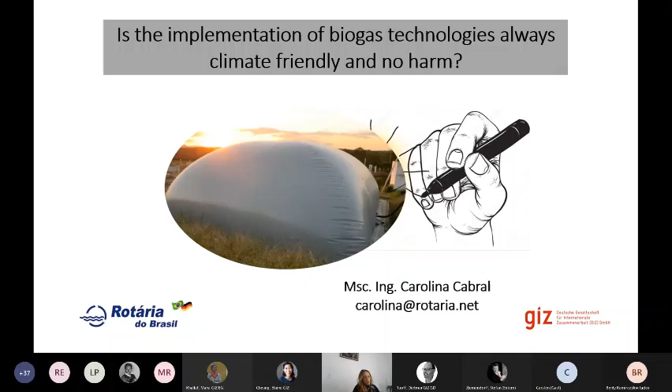So in theory, the anaerobic treatment is less energy intensive. You have biogas production that you can use for energy recovery, and it consumes less energy from the traditional sources. If you have energy recovery, then you consume even less energy from traditional sources, and then you have emissions reduction, mitigation. So in climate-friendly projects, the common thought is that anaerobic treatment with biogas recovery is always better for the environment than aerobic treatment.

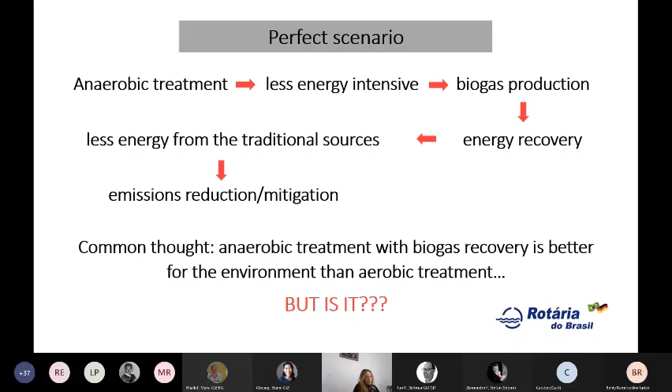When you talk about wastewater treatment, you need to consider if the project is going to be fully implemented and well operated. But yes, of course, for wastewater treatment, anaerobic treatment systems have large applicability. They have several favorable characteristics like low cost, low solids production, and operational simplicity. Also the environmental conditions in Latin America and other warm climate countries are favorable to anaerobic digestion. So this is an option we should consider, especially in these countries, to apply this kind of technology.

But if you think about biogas projects, or anaerobic treatment systems that use the biogas being produced, then this step, the operational simplicity, is not that simple anymore. So this is something we need to consider.

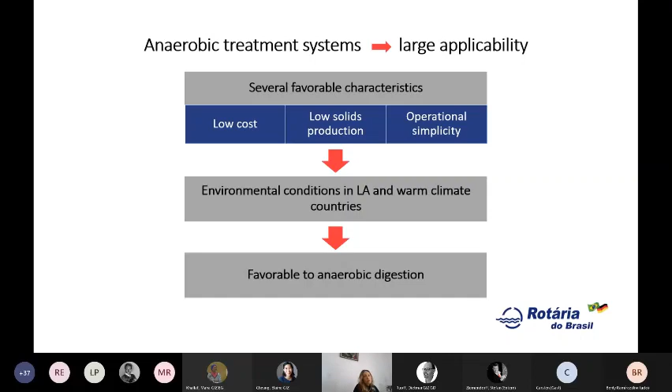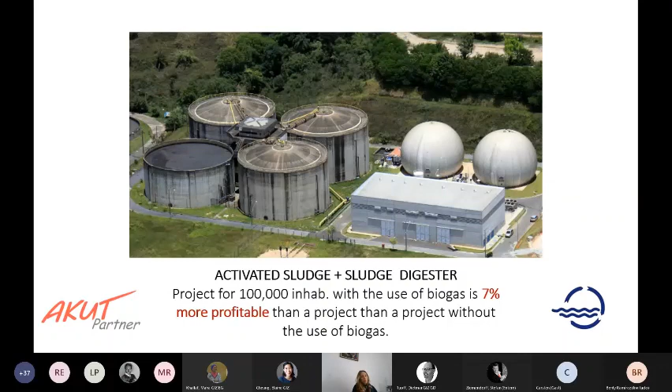But in projects well operated, we calculated some scenarios, and yes, usually the projects with biogas recovery, with energy recovery, are more climate friendly and also more profitable than a project that doesn't use the biogas. So we did scenarios with different treatment technologies. For example, activated sludge plus sludge digester: a project with 100,000 inhabitants using biogas is circa 7% more profitable than a project that didn't use the biogas. This considers all investment and operational costs for the biogas treatment implementation, the CHP implementation, and all the energy recovery parts. So it's even more climate friendly, and also 7% more profitable because of the energy being produced.

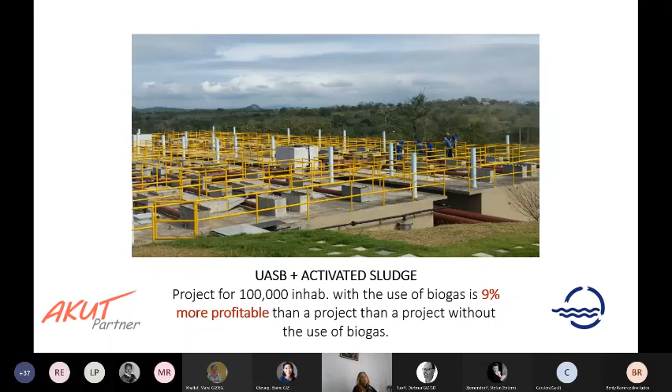In another scenario, with UASB reactors that are really common in Brazil, especially this configuration—UASB reactors as a first step and then activated sludge—using the biogas was 9% more profitable. But if we consider two different technologies, for example UASB plus activated sludge versus extended aeration activated sludge, then of course extended aeration is very energy intensive, so using the biogas was 40% more profitable.

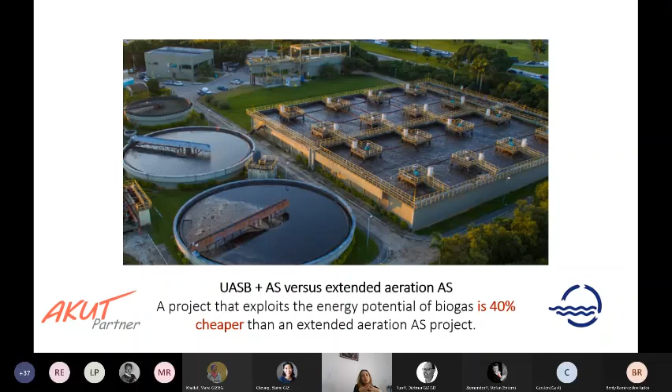But this is all considering that the anaerobic part is well implemented, well operated, and that all the biogas is being collected and transformed into energy. But if we consider a UASB reactor, for example, that is really common in Brazil, or even anaerobic lagoons that are really common in Latin America, badly operated or not well sealed—we have problems with the covers from the anaerobic lagoons—then versus aerobic treatment, the CO2 equivalent emissions are higher than the CO2 equivalent emissions from the energy consumption of the aerobic treatment.

This is something we need to consider, because sometimes, and of course the main goal of the wastewater treatment company is to treat wastewater. But sometimes they look at the whole project and think, in the future you can use the biogas, so let's implement this, or we're going to collect all the biogas and at least flare it, burn it. But then, due to the money available or other conditions, they focus on the water part, the wastewater part. They implement the project and don't really have the concern with the gas part.

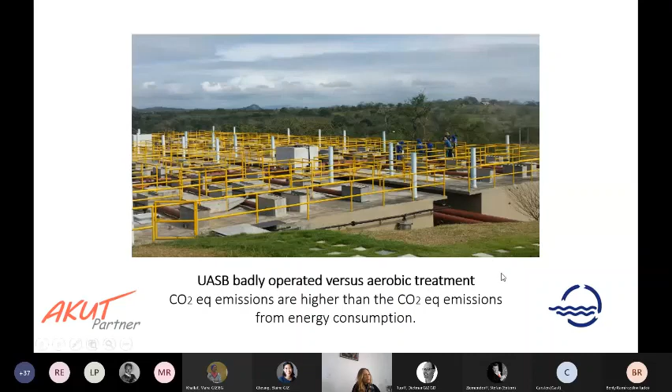So we found some problems in these reactors. I'm not going to get into all of them, but scum accumulation, and then the biogas could not get through, or lots of leakages, as I said, systems were not well sealed. So you had emissions, and other emissions as well. Also you need to consider the methane that's dissolved in the liquid part. So all of that caused the biogas being collected to not be as high as we expected.

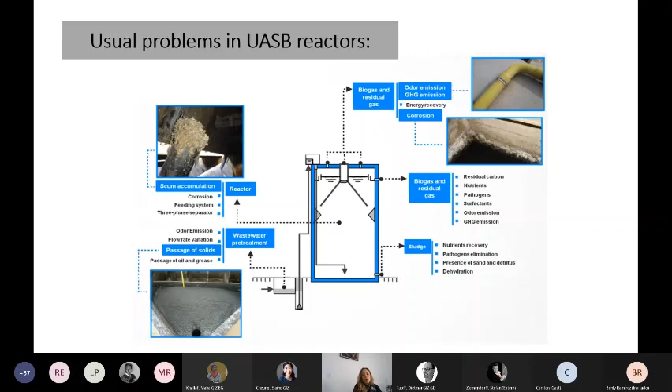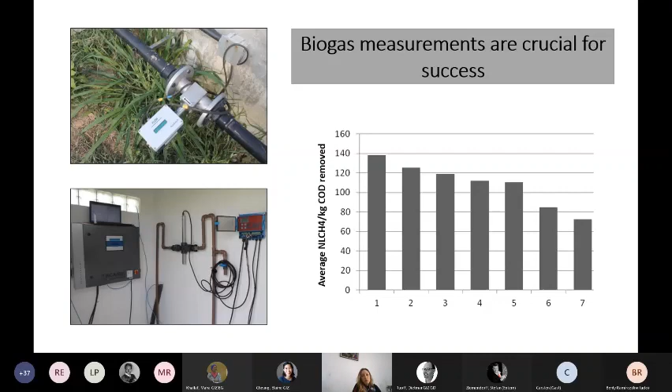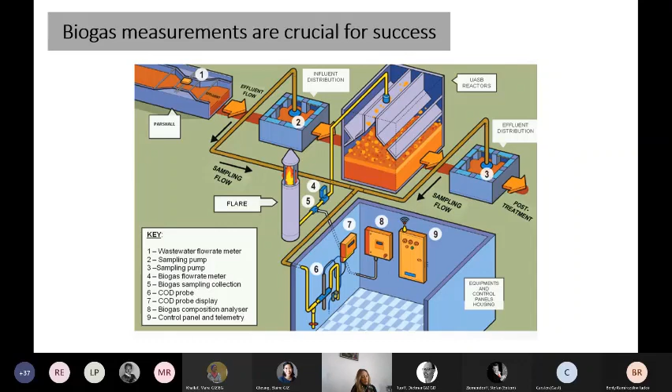And we found that out also in the Pro-Biogas project from GIZ here in Brazil. So we measured the biogas production in 10 wastewater treatment plants—I'm going to show it quickly. We basically measured all of it: the wastewater flow rate, the COD in the income and outcome, the biogas flow rate, the biogas composition, and then we compare it with the scenarios, we have it here.

We have here the best scenario, which considers some leakages and some methane dissolved, but with the UASB well operated. And if you compare it, none of the stations, none of the plants reached the best scenario. That's usually the scenario you would consider for a new wastewater treatment plant and for considering an energy recovery project.

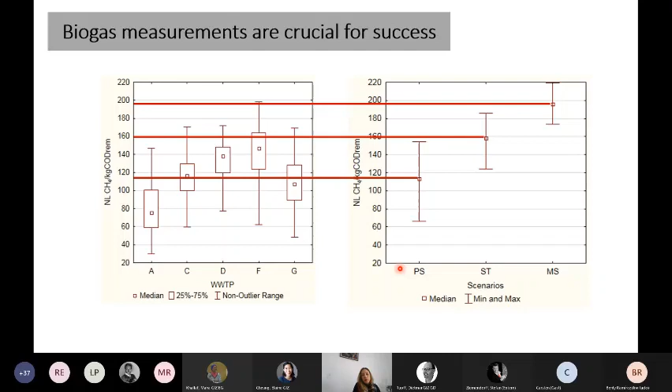And there are some other plants that are not here, but they were even below the worst scenario, where you consider the system's not sealed and there are lots of leakages and biogas losses. So that's why we recommend measuring the actual biogas being collected and implementing improvements in order to be able to collect more biogas.

So we can talk more about this later, but I would also like to talk about, yes, in UASB reactors you have lots of variables and it's harder to determine the biogas production, but usually the biogas being collected is not as high as you would expect in theory. So you have to consider all these losses, and whenever possible, you should measure it.

That's really important. And even with plants with the same size, we found that one plant was in the typical scenario and another plant was even below the worst scenario. So this can influence a lot on your business model.

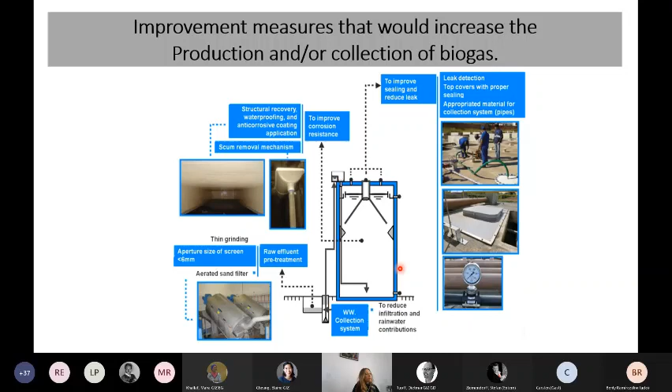But also, okay, UASB reactors are a bit more difficult, but I would also like to talk about sludge digesters because they are a bit easier. The technologies don't have so much leakage, but still you can have some problems when they are implemented in countries that don't have this knowledge well spread.

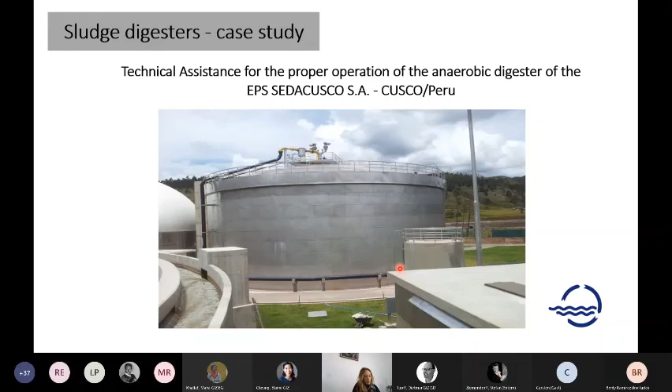And so that's what we found in Cusco, for example. The biogas flow was much lower than expected. And this is what happens also: it was really hard to find the answers and the operators to know what was going on and what was the problem, why the biogas flow was so much lower.

And when you don't really have, oh okay, I'll ask the wastewater treatment plant next to me that has the same system and maybe they can help me - when you don't have that, it's much harder to find that out. And that's why it's also really important, the example that Benty gave about the learning networks. This exchange of experiences of well-implemented projects is also really important.

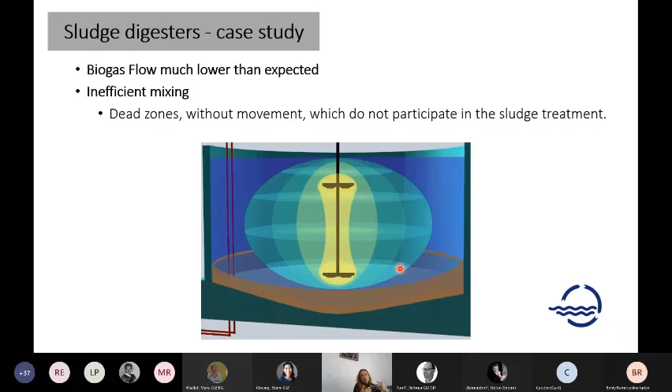And then we found that biogas flow was much lower due to a number of reasons. One of them was inefficient mixing. Another was the position of the sludge circulation pipes. And the heating was not properly distributed as well. So these are some of the reasons.

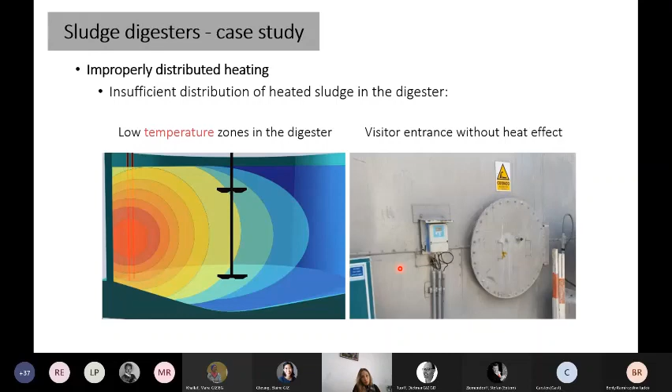But at the end, what we can conclude is, independent from the technology - you can talk about digesters or UASB reactors or anaerobic lagoons - some of the lessons learned are the same. That is, for existing wastewater treatment plants, it is really important to measure the collected biogas.

It's, as I said, usually much lower than what you would expect from just applying that simple equation from theory, from the book. And then you choose your engine according to the actual biogas being measured. And then you define your business model, because this influences a lot.

And you also need to consider ensuring effective operation to avoid unscheduled motor shutdowns. As Christoph said, one simple pump in this project in Bahia caused one month of unscheduled motor shutdown, and even more actually.

And it is why it's also really important to choose a procurement procedure that anticipates these difficulties, because you need specialized operation. The utility, the wastewater utility, is specialized in wastewater treatment and not in gas treatment, or especially in energy recovery. So you have lots of difficulties.

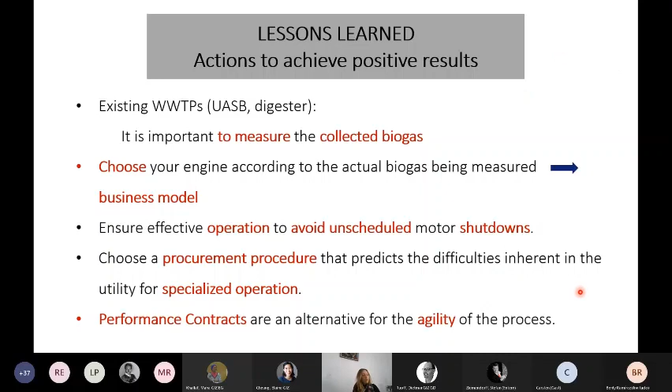And I hope to see soon lots and lots more projects in Latin America and in other countries. And I'm looking forward to hearing also Carsten talk about Costa Rica. So thank you very much. I'm looking forward to the discussion.